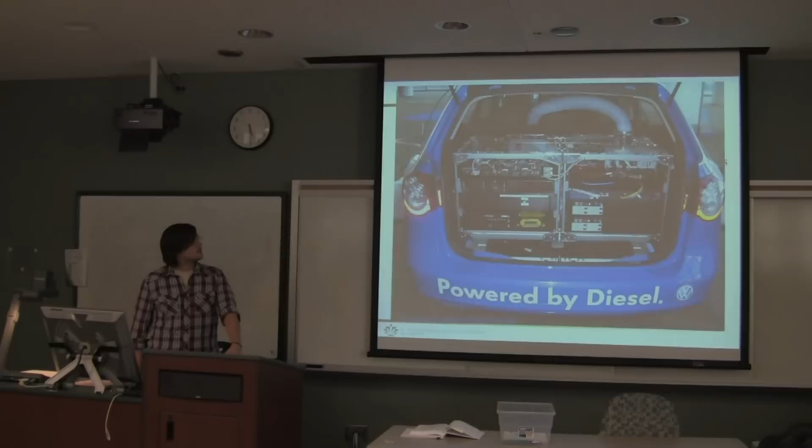Question for you: is this the DARPA Grand Challenge or the DARPA Urban Grand Challenge? Just said Grand. Okay, because it had a lot of LiDARs on it, and that's typically what they used in the Urban Grand Challenge, because that was the one that worked on streets and you needed to have LiDAR on all sides of you. The course here was mainly just a dirt gravel road, and it also had a winding mountainous road too, so that's probably why they used them. All right.

Alright, so I did the ASIMO robot that's built by Honda. It was one of the robots found in our book, and I thought it was pretty interesting because it's pretty much like a humanoid. It can do almost everything that we can do.

So that's pretty interesting. And it also has voice recognition, so you can tell it to go do some type of task, like bring you a cup of water, and it would know where that is in the building and go retrieve that and bring it back to you.

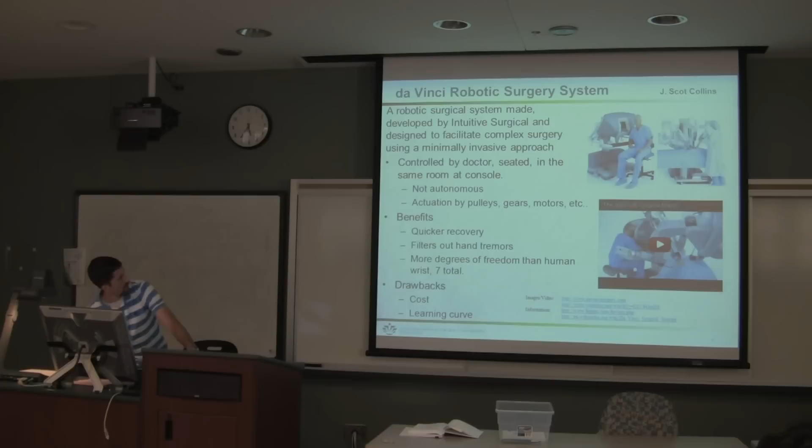Okay, are you done? Yeah. Okay, if you can hit the slide, I'll see the video. Okay, I'm going to attempt to turn the sound off. Okay. I'm going to let the video play in the background while I talk about it if you're interested in looking at that versus me.

Hello everyone, I'm Scott Collins. I went into the Da Vinci robotic surgery system. Basically what it is a doctor controlled, basically like a remote control car, but it's a surgery system where it has 4 arms. Each arm has a tool or an instrument, 3 of which have a scalpel, tweezer-like tool that you can stick inside with very small incisions in people as they're doing surgeries.

And each arm has 7 degrees of freedom, so it's more than a human wrist. The doctor sits over here on this side station and controls the movement of the robot based on the camera that is also on the 4th arm. He gets a 3D vision and can see pretty detailed. I think it's magnified 10x in his view, and his movements can be scaled to anywhere from 1 to 1 up to 1 to 5, so really microscopic movements he can make with his tool.

The benefits are big, very minimal recovery times due to the incision sizes. It's just 1 to 2 centimeters for each tool to get inside and actually work. It rotates along this basis here, so it's just inside this hole, maneuvering inside based on the degrees of freedom, so it's not completely autonomous. It has actuation by DC motors, which run pulleys and gears, actually moving all the utensils and the degrees of freedom in the ways that it moves.

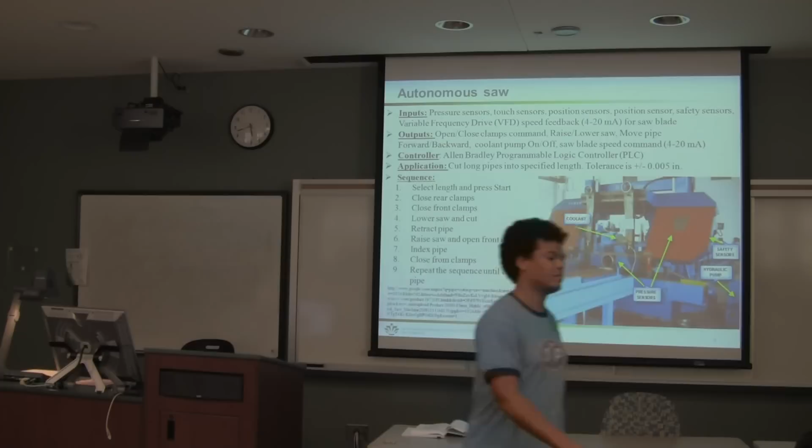My name is Newton. As Dr. Carter mentioned during the first week of the class, most robotic applications are in manufacturing facilities to increase efficiency, speed, or precision. The robotic application I present today is one I worked on before.

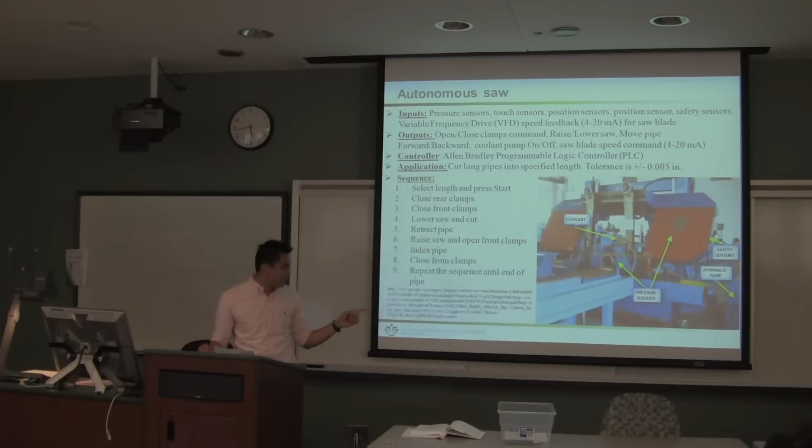The robot is not mobile equipment at all, however it meets all the criteria we define for something to be a robot. For example, it has a power source from the control panel. It has a hydraulic pump to control the linear motions. It has a controller, which is the Allen Bradley PLC. It takes inputs from the sensors, processes them, and outputs the command.

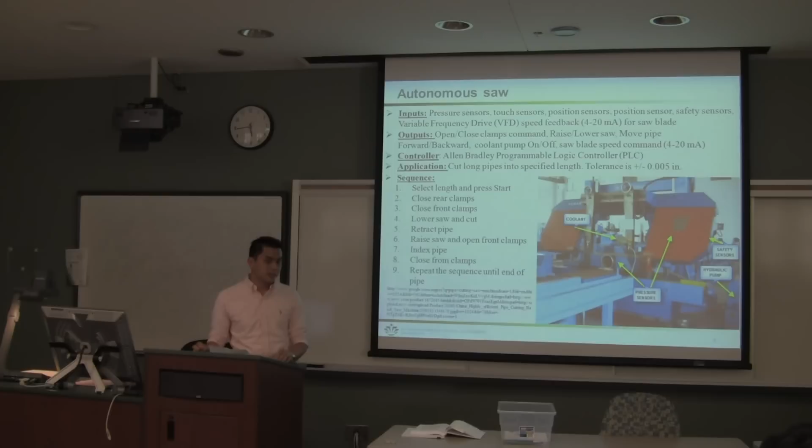These are the main steps in the operation sequence of the saw, and its purpose is to cut the long pipe into smaller pieces with a precision of plus or minus 5 thousandths of an inch. It is autonomous because once the operator knows what length he wants to cut the pipe, he just sets the length, hits start, and it runs continuously until the pipe runs out. That's all I have.

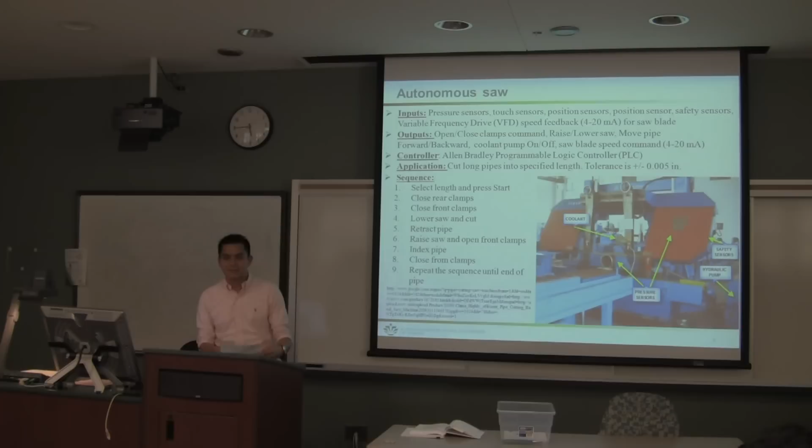All right, any questions? By the way, I think this is the only manufacturing robot that anybody talked about. Everybody wants the cool stuff that moves, right? Driverless cars and things like that. Yeah, all right, if you could advance.

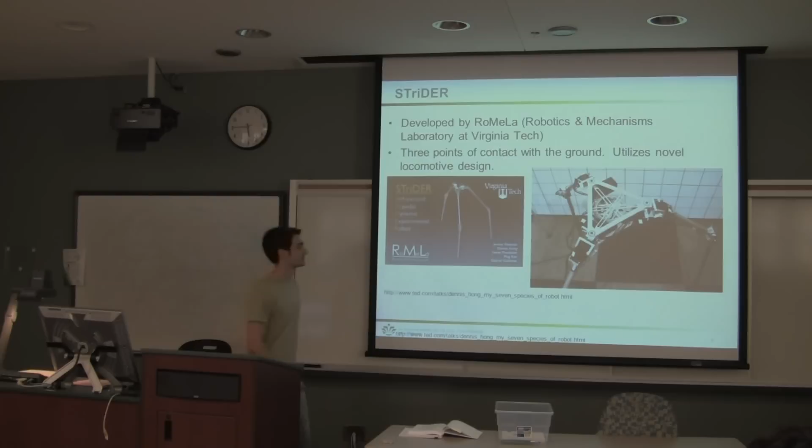This one is called Strider. It was developed at the robotics lab in Virginia Tech. It was a demonstration for locomotion basically, serving no other purpose than to demonstrate the apparatus they built. The reason I chose it is I found the mechanical system really cool, kind of like a Swiss watch. I'm not exactly sure how this works, but you have a rotational gear here and actuators on each leg. It's got 3 points of contact, so as we discussed, that's all you need for stability.

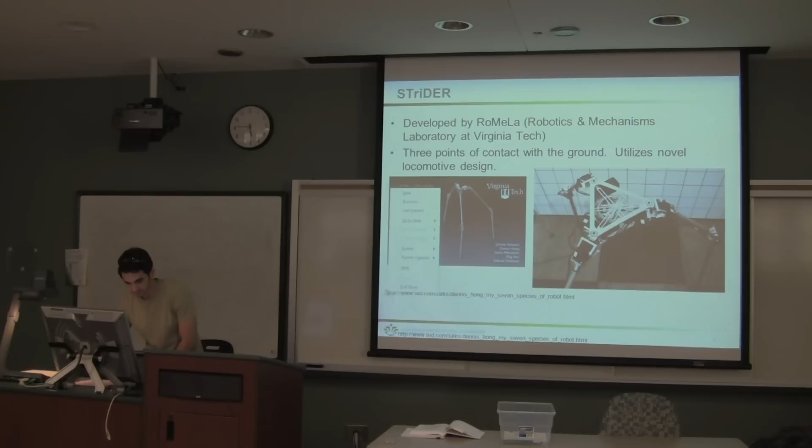So I'm going to try to play this video. Any way I can copy and paste this? You have to get out of there. You have to. Keep on down. Copy the link. Oh, you got to turn it back up on the console there.

Have you seen anything in nature like that? Before that, you know H.G. Wells' War of the Worlds novel and movie, and what you see here is a very popular video game. These fictions describe alien creatures and robots with 3 legs that terrorize the Earth, but my robot Strider does not move like this. This is an actual dynamic simulation animation showing how the robot works. It flips its body 180 degrees, swings its legs between the 2 legs and catches the fall. That's how it walks.

When you look at us human beings with bipedal walking, you're not really using a muscle to lift your leg and walk like a robot. What you're doing is swinging your leg and catching the fall, standing up again, swinging your leg and catching the fall. You're using your built-in dynamics, the physics of your body, just like a pendulum. We call that the concept of passive dynamic locomotion. When you stand up, potential energy converts to kinetic energy, and applying the principles of walking to this robot, it absorbs the shock and starts walking.

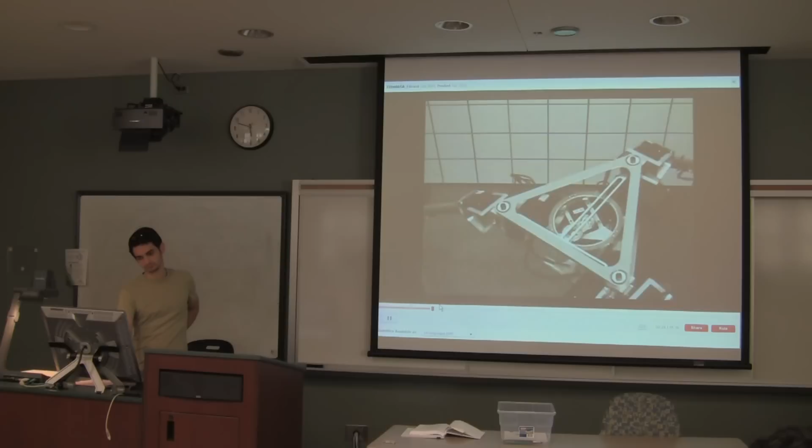So we have 2 prototypes. The first version in the back, that's Strider 1. The one in the front, smaller, is Strider 2. The problem we had with Strider 1 is it was just too heavy in the body, with so many motors aligning the joints and those kinds of things. So we decided to synthesize a mechanical mechanism to get rid of all the motors, and with a single motor we can coordinate all the motions. It's a mechanical solution to our problems with mechatronics. So with this, the top body is lightened up, and it's walking in our lab. This was the very first successful step. It's still not perfected, it still falls down, so we still have a lot of work to do.

The second robot I want to talk about is called Impasse. If you're interested, that guy has every robot in his lab like something you've never seen before, so it'd be good to go check out if you're interested.

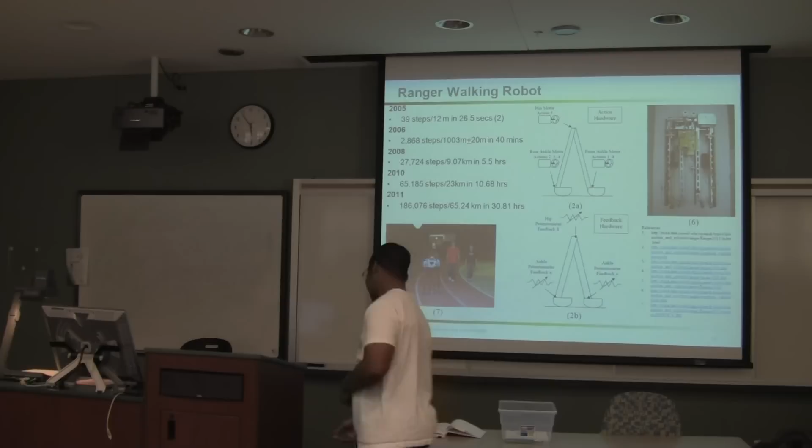Mr. Hunter. Is that the real one or the human?

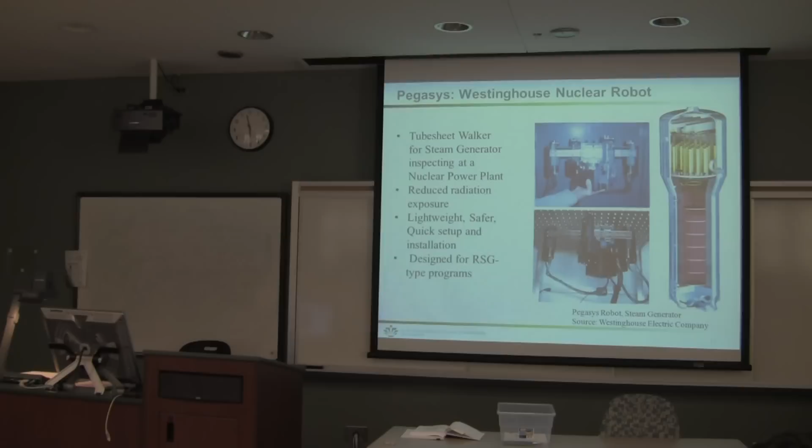Presenting the Pegasys robot, which is a Westinghouse company model, designed for inspection and maintenance in a steam generator in a nuclear power plant. Typically in a PWR, a pressurized water reactor power plant, you have the primary system which runs to the core of the reactor, then goes to the steam generator, generates steam, then goes to the turbine, then to the generator. The steam generator has tubes for the primary and secondary systems, and it's considered a high radiation area.

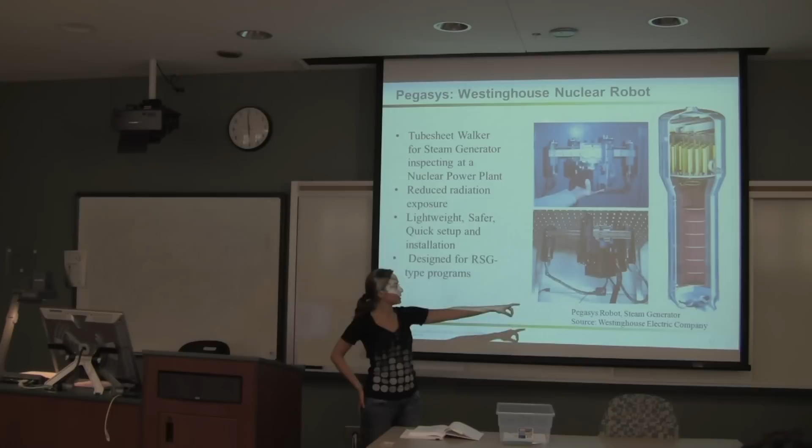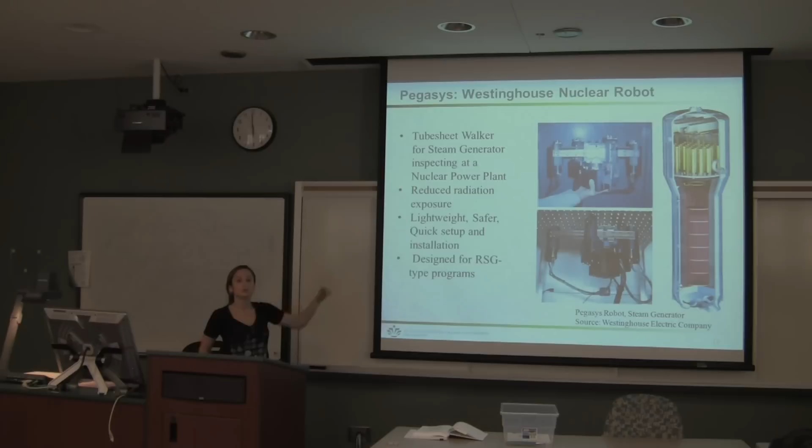So typically a robot performs maintenance instead of humans to minimize safety risk. The Pegasys is used at what's called, at the bottom of the steam generator, the tube sheet. What it does is latch onto it, and by sensing and gripping, it runs the tube to do inspection for leaks and breaks in the tubes.

What are the motors and sensors that it uses? I wasn't able to get information about the sensors. I know it has touch sensors and a camera, but I wasn't able to get a lot of information about it. They don't want people to copy it - it's secret, secret.

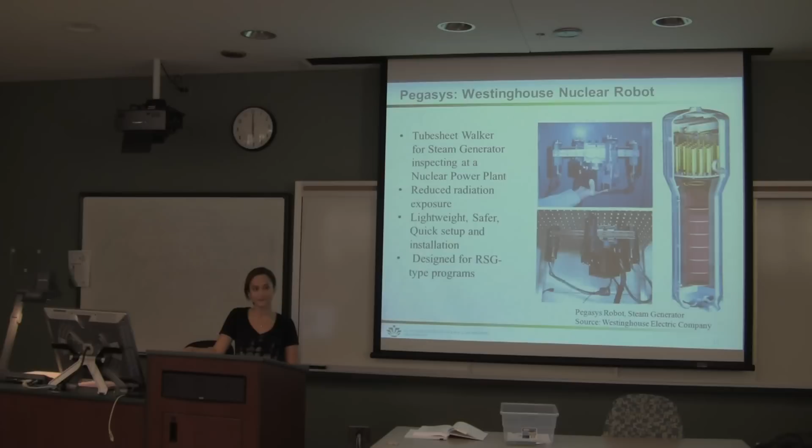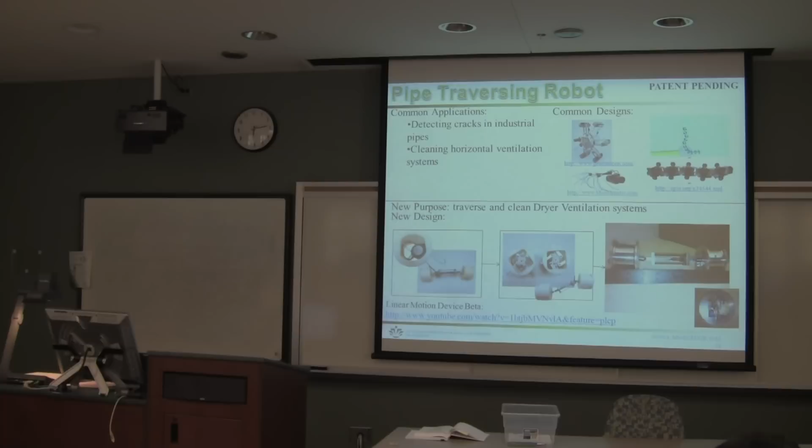Oh, I have a question. Do you know what plans they have for using that robot? Well, actually, I'd seen a similar robot in Star Wars. Oh, and we know that's real life. Yeah, in the second one, Attack of the Clones, Obi-Wan Kenobi goes to figure out where those particular bullets are from. He meets his friend with six hands. So the waitress over there is one of these robots carrying drinks around. So maybe that. Here we go, get your waitresses. Alright.

I'm Jessica Meeks. I'm going to go over a UNC Charlotte project for a pipe traversing robot. This pipe traversing robot is designed to clean out and traverse through dryer ventilation systems, basically your household dryers doing laundry and all that. What you usually use pipe traversing robots for is more detection and inspection of industrial sized piping or commercial HVAC systems, which can be seen in the designs over there.

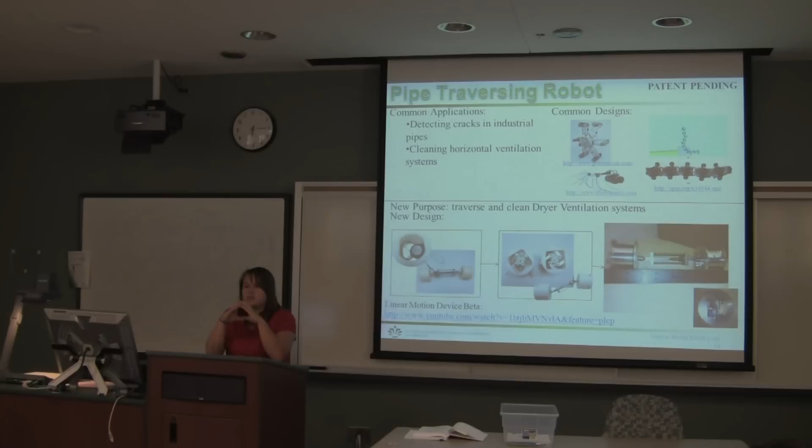The thing about all these designs is they're very large, very bulky, and usually one section. The pipe traversing robot we've been working on, because the dryer ventilation system, if you think about it, is very small, it's 4 inches in diameter, and it's made up of everything - really flexible, puncturable material, as well as very rigid, slick material that you can slide down.

So to compensate for both of these materials, we came up with this airbag inchworm design. Basically the airbag inchworm has 2 anchor ends. So in our several designs, we each have 2 chassis on each end. One chassis inflates an airbag while the linear motion device in the center, which is a screw device I'll show you a video of in a second, extends out, then the other chassis inflates, and the back chassis deflates and contracts, so it inches through the system.

We've gone through several designs with different kinds of pressure, and the basic end design we're at right now is a pump system, a closed-end pump system that alternates the air in between. This design also allows us to go into smaller spaces, possibly plumbing, where there's a lot of water and everything.

So all we need to do is encase the electrical system, which will be made up of a microprocessor for the controls of the motor, as well as an accelerometer and gyroscope, because there are 90 to 180 degree turns in there that we need to shorten the extension time for, to make up for that and make sure we're not putting too much pressure and puncturing those areas we talked about before.

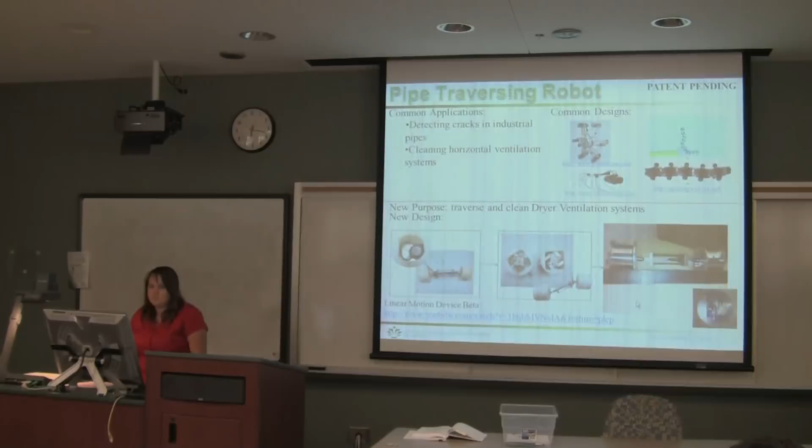Any questions? Was this your project? Yes. How does it detect cracks inside a pipe?

This doesn't actually detect the cracks. This one is based around cleaning the pipe. So what it will do is traverse all the way through, and then you attach a brush device and pull it back through, so it cleans out the dryer lint, because the lint will ignite at times and cause house fires and a lot of damage.

Mr. Morgan, the word I heard most frequently when I showed this to people was, "Isn't that cute?" That's good.

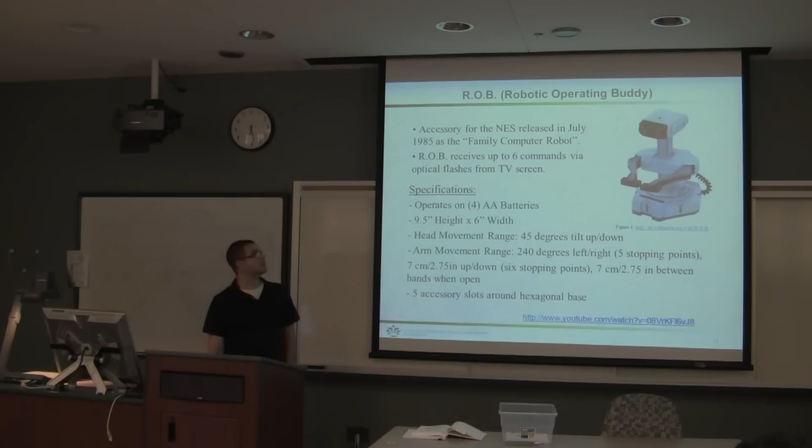It was an accessory for the Nintendo Entertainment System, released in July 1985. It was marketed as a family computer robot. Rob, the robotic operating buddy, receives up to 6 commands via optical flashes emitted from a television.

It worked in conjunction with a cathode ray tube, an old TV, and that's what gave it its commands. Certain colors emitted on the television screen gave it commands for what functions it needed to do.

Some specifications: it operated on 4 AA batteries. Its height was about 9.5 by 6 inches wide. Its head could actually tilt 45 degrees up and down. Its arm movement was a full 240 degrees. The shoulders actually moved, with 5 stopping points.

The hands would open, almost like a claw. There were 2 games developed, Gyromite and Stack Up, both of which came with certain accessories relative to each game. I'm going to show you a video here of R.O.B. in action.

You should be able to just click on it. Put it full screen and then click. Control click. You missed the H at the beginning, just type H. He's going to drive it. HTTP, he'll probably take it as just an H. Alright, good stuff, volume on. Oh yeah, I hit mute volume. Be careful, the volume will be very loud. I don't think there's anything going on. Bond, and this is... oh it's that small? It says 9.5 inches.

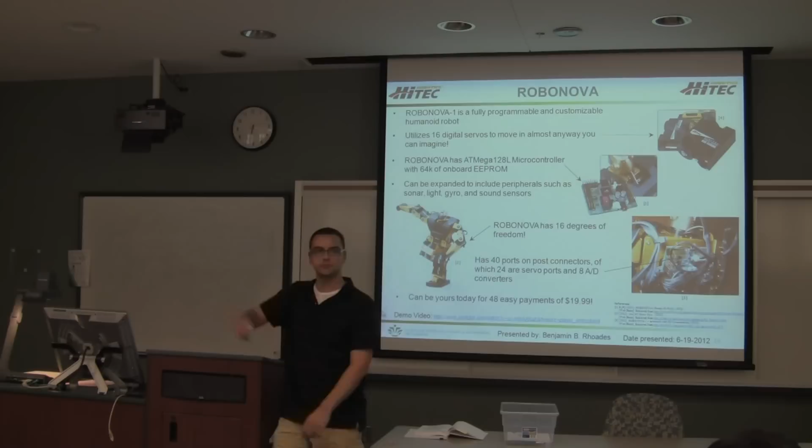As you can see from the picture, it actually utilizes 16 servo motors. There's ROBONOVA 1 and ROBONOVA 2. It was developed in 2008 by Hitec, again using 16 digital servo motors.

It's programmed with an Atmega 128, which is pretty common, especially in the ECE department and the EP department. We use that microcontroller to death.

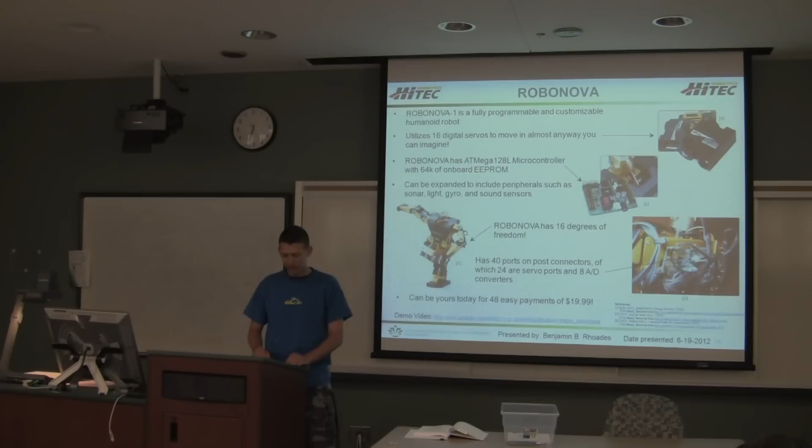The great thing about this was it was used as a developmental platform, so it can be programmed with a high-level language such as the Lego kits we use, all the way down to assembly language programming. It's made for a wide variety of uses and programmers to get used to this many degrees of freedom, which is 16. It can also be expanded with many peripherals such as sonar, light, gyro, and sound sensors. Many videos I found develop their own different claws and apparatuses to use with the extra additions. Since it has 40 ports on the Mega 128, it can include up to 24 servo motors.

So it includes 16 servo motors, but can be expanded to 24. Your imagination can really go if you want to figure out uses for this robot. It's also pretty expensive. If you like this robot, you can buy it for 48 payments of $19.99.

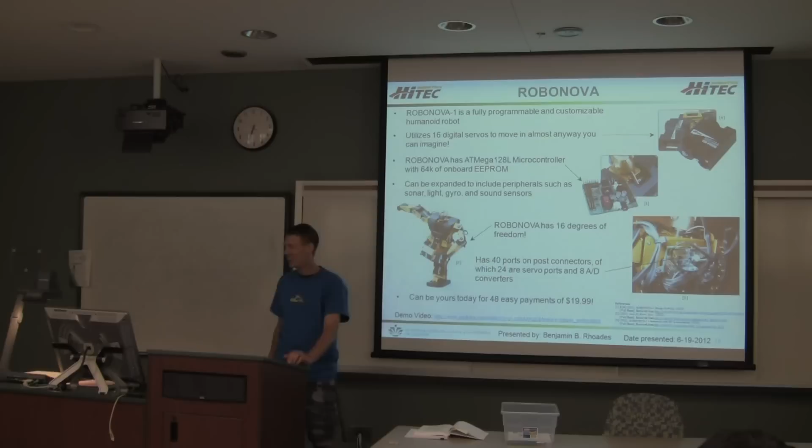As we mentioned in class, each degree of freedom comes with a cost. So with 16 degrees of freedom, it's going to be very expensive. Although you can perform life operations with 7 degrees of freedom, what can you do with 16 degrees of freedom?

You actually can write your name. This robot named Thor was programmed to actually write his name with a pen. You can see the varying degrees of freedom here. At the very end, he's very happy - he shakes his head because he's so happy they wrote his name, and he underlines it because it's very important.

So he needs work on his skills, huh? He does - he's currently at a first grade level. They're working on a more advanced level at this point.

But that's pretty much ROBONOVA. Any questions? All right, next.

Soccer boys. Alright,

I'm going to talk about NAO Robot. The NAO Robot was designed and built by Aldebaran Robotics. It took about 10 to 15 years to do research and get all this robot together.

It uses a computer powered by a 1.6 gigahertz Intel Atom processor. Sensors: it has 2 HD cameras, one on the forehead, the other on the mouth. It has 4 microphones to detect locations of sounds - 2 in this area and 2 on the sides. It has 2 speakers on the side, a tactile sensor on the top of the crown, and 4 sonar sensors for distance on the chest.

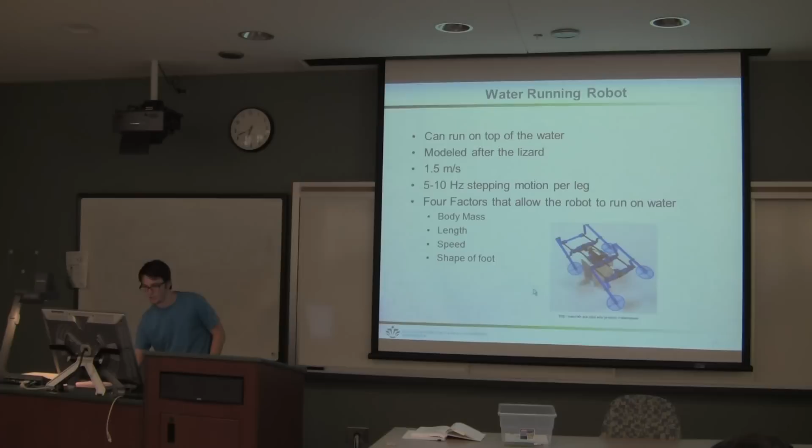So I've got a video of this thing in action. Your video doesn't... yeah. Dude, look at that one. Oh, no video, just a photo. So, picture. Eugene, minus 2 points. Okay, well...

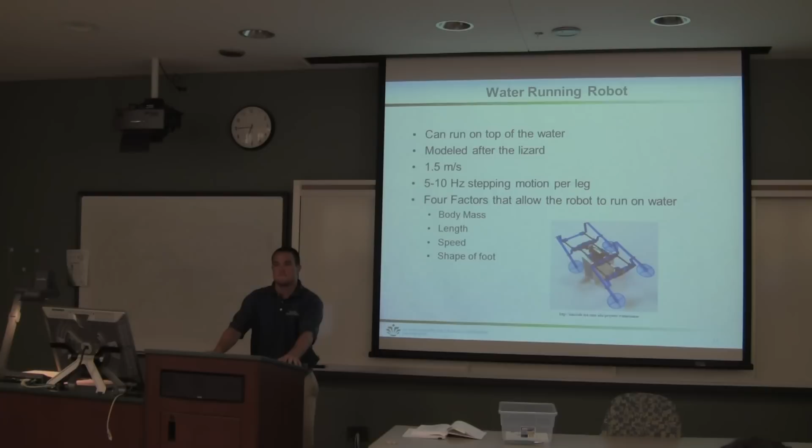All right, thank you very much. Wow.